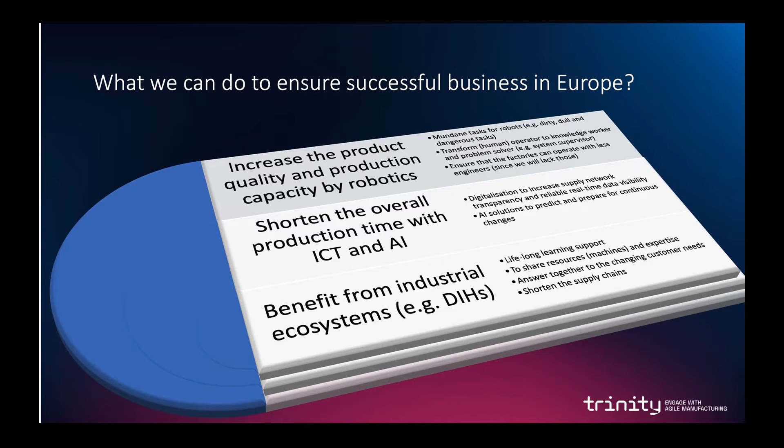In Trinity, our main objective is to create a network of digital innovation hubs. We want to have an established network of competencies around Europe. On that, we want to create a sustainable business model so that our network will be there for the next 5 years, for example. So we are looking towards the horizon of keeping up the network.

The third objective is to create a critical mass of use case demonstrations, assembled from different technical modules that can be reconfigured to fit the different purposes companies may have. In relation to today's topics, we will go through the services relating to the utilization of these different modules, which we hope are suitable for the upcoming open call number 2.

This was a very brief introduction to the Trinity project and the topics of today. In the Finnish part of this session, we will go through this in detail. Thank you.

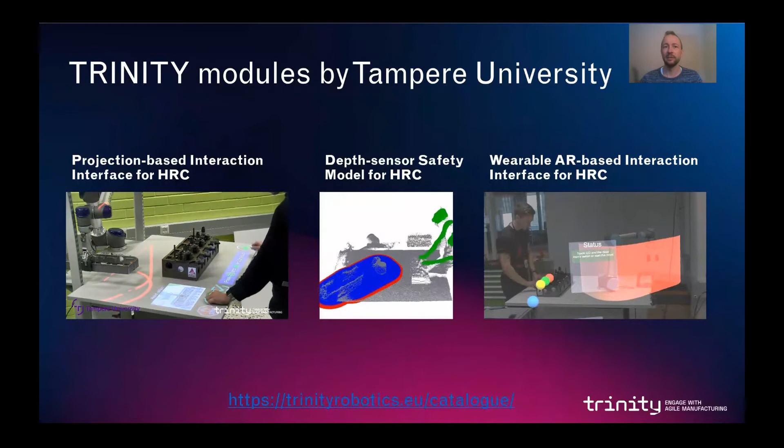Then we have the technical modules provided during the Trinity project. The 3 modules by Tampere University are the projection-based interaction interface for human-robot collaboration, depth sensor safety models for human-robot collaboration, and wearable augmented reality-based interaction interface. One possibility for how to implement these modules will be presented again in the last presentation of this session.

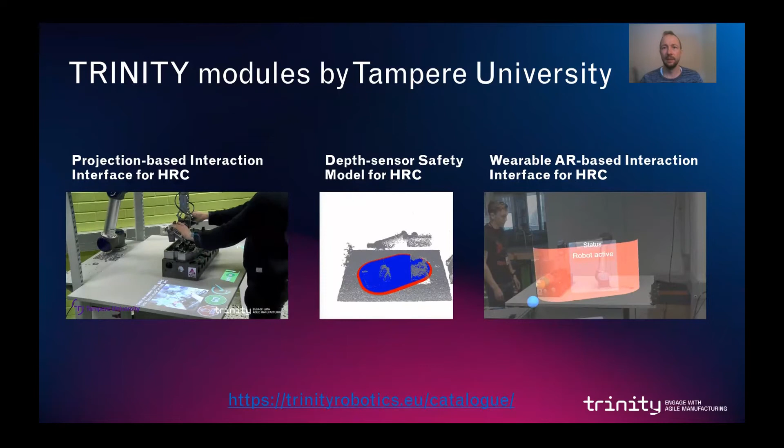Related to these modules by Tampere University, we can provide a bit more technical support and guidance on how to use and utilize these modules. All the code is open source, so you are free to use it and, for example, implement it in your own demonstration. They will later open a Trinity training platform where all the Trinity modules will be accompanied by different training material on the possibilities of these modules, how to implement them, how to use them.

So they all come with built-in training modules as well. But this work is still going on, so not all the material is available yet, but it will be coming bit by bit to our YouTube channel, and then it will also be listed in this training platform.

The help we can give you here is guidance and technical support, but if it requires more hours or more research work, then this needs to be negotiated case by case. This applies to all Trinity partners - they have resources to help you, but those need to be negotiated with the partners.

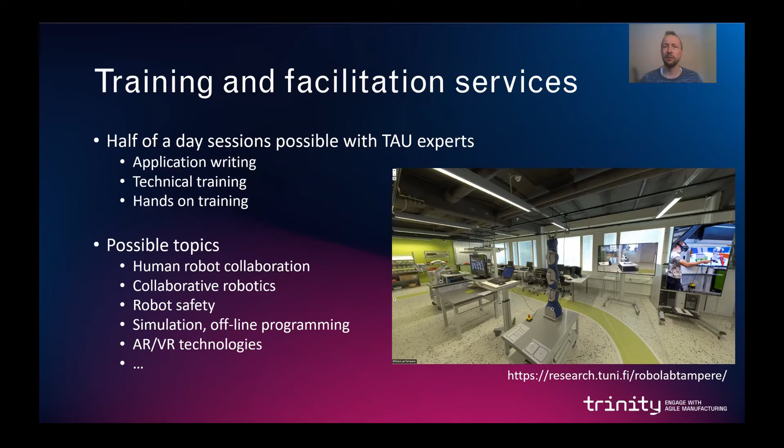These are just a couple of examples of what we have to offer, and feel free to contact us and request if you have any other needs. And that concludes the part of Tampere University services for Trinity.

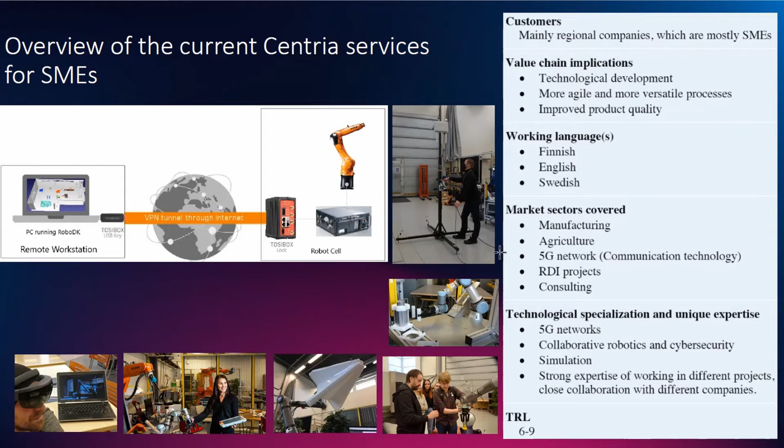And there is also cybersecurity, which is a very important part of robotics because usually the robots are quite vulnerable in industry, but there are possibilities for how you can solve these cybersecurity issues also. And then there is simulation, and CENTRIA has strong expertise with close collaboration with SMEs.

And here are the main topics which CENTRIA offers for Trinity-related services. And we have concentrated on Industry 4.0 technology, and we are offering analysis, demos, workshops, training, and different kinds of experiments with them. So we can do consultations and also consultations for funding and application writing, as Jyrki mentioned.

And for robot and cobot applications, we usually start with simulations, then we go to proof of concept or demos, and there is also a possibility to run experiments either in our laboratory or in SMEs' production facilities, and we can also offer training, for example, for robot programming or for robot simulation.

Same thing is with the safety systems. We usually start from simulations, then we can go to demos and experiments, and often we also create digital twins of robot cells or production lines if we are going to have a longer collaboration. Reverse engineering, which means 3D modeling, 3D scanning, and it can also lead to 3D printing, is often used.

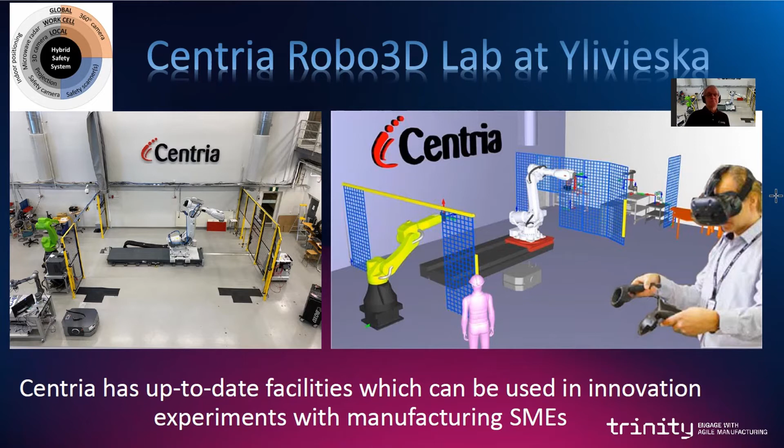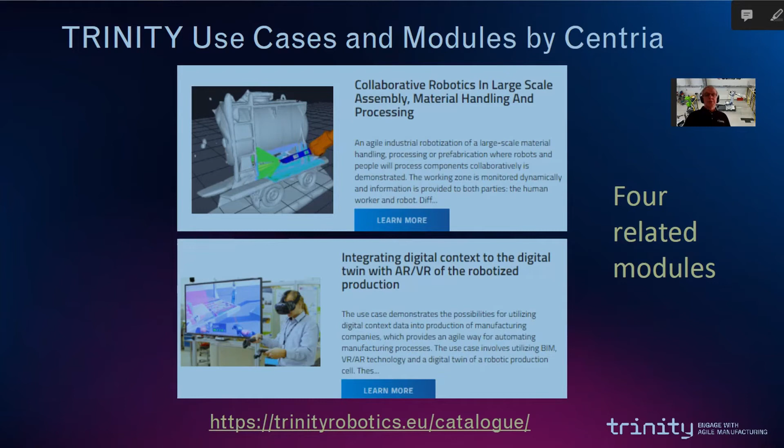So our use cases and modules are collaborative robotics in large-scale assembly, material handling and processing, and there are 3 modules related to that, and also the other, integrating digital context into the digital twin and AR VR of the robotized production, includes 2 modules. One is common with the other one. And Tero Kaarlela will also go deeper into these modules. And you can also find the modules and these use case demos in the Trinity Robotics catalog from our webpage.

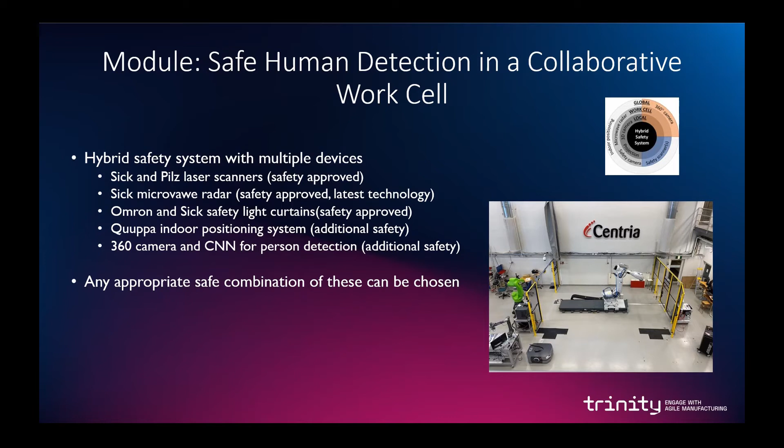And this module consists of multiple safety approved devices such as laser scanners, microwave radars, and safety light curtains. Additionally, this system also has safety devices for improved safety such as indoor positioning and 360 camera systems. And let's move on and see video of our hybrid safety system.

First, we will look at safety approved devices in this system. First is the light curtain in front of industrial robot cell. Second is laser scanner on the right side of the robot cell. And then we have laser scanner and microwave combination on the left side of this robot cell.

And the two laser scanners and microwave radar have been configured so that they will allow our mobile robot to pass these safety devices, but nothing else can pass. So humans will stop the industrial robot movement, but the mobile robot can pass all these fences created with safety devices. And in addition to these devices shown here, we also have

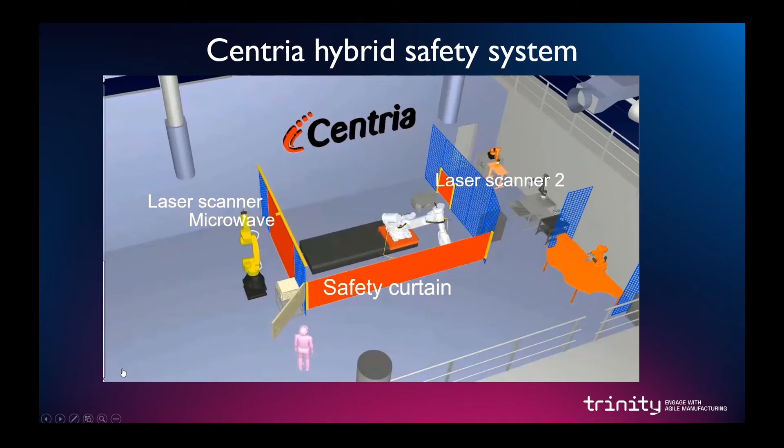Quuppa indoor positioning system that can be used for locating human workers inside our laboratory. This can also be used to locate forklifts and mobile robots, basically anything that is moving inside production facility, or in this case, in our laboratory.

Quuppa indoor positioning system is based on Bluetooth low energy, and we have the beacons in the ceiling, stationary installed, and all the moving parts like workers or forklifts have a Quuppa tag, a small Bluetooth tag with them, and it creates the location for them in order to create digital twin of this laboratory.

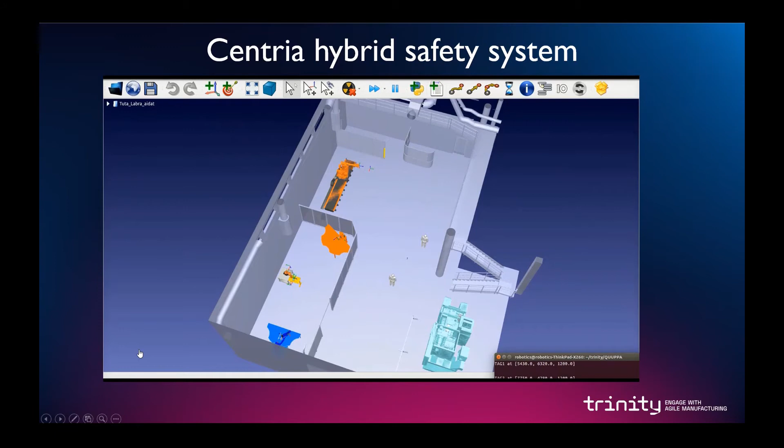Our next module is dynamic robot trajectory generation. Idea of this module is to utilize 3D camera for sensing robot work environment. Basically, this module adds vision capability for robot controller. Camera can be any of popular models such as Intel RealSense or Microsoft Kinect.

Module provides capability to scan robot environment and to create new trajectories for robot in case obstacles are detected in current path. Let's say that someone puts an object on the robot's path. The module will calculate a new trajectory that will go over this obstacle on the fly. This module is currently based on ROS, but it can also be implemented with RoboDK or AutoMAPPPS.

Our third module is online trajectory generation for industrial robot with 3D camera. Also, this module supports many different cameras, such as Intel RealSense, Orbbec, or Microsoft Kinect, or maybe even Artec Leo. Idea of this module is also to utilize 3D camera for sensing robot environment, but for different need.

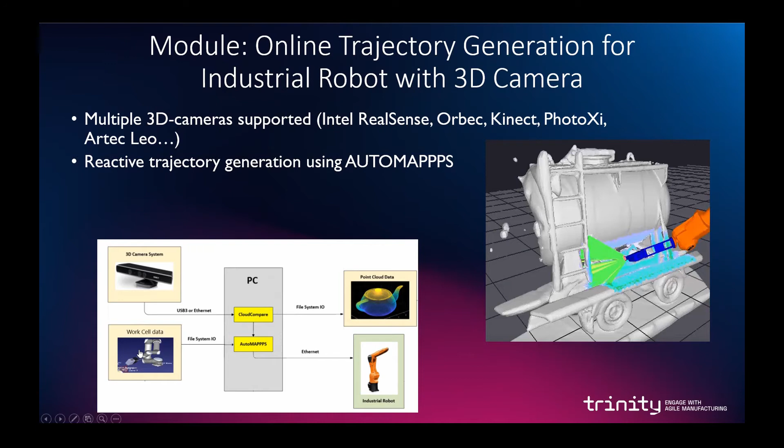Our last module is about integrating data needed for robotized production into product design data at very early design phases. This way, it is easy to utilize in production phase and avoid work in the production phase of the product.

Digital design content data can also be used when creating a digital twin of the work cell, which can be used in AR/VR experiences for monitoring, operational support, training, safety, and maintenance purposes. Picture on the left shows digital twin of robot controlled with VR equipment. Picture in the middle shows a VR experience for training purposes. Picture on the right presents a VR experience for safety training in mining environment.

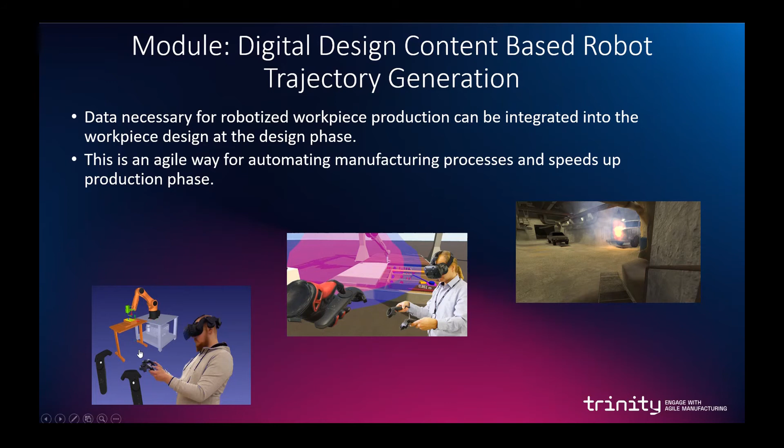Here, our first use case demonstration is presented. This use case demonstration is collaborative robotics in large-scale assembly, material handling, and processing. This use case is based on 3 modules shown before. First one is the safe human detection in a collaborative work cell. Second is dynamic robot trajectory generation based on information from 3D camera. And third one is online trajectory generation for industrial robot with 3D camera.

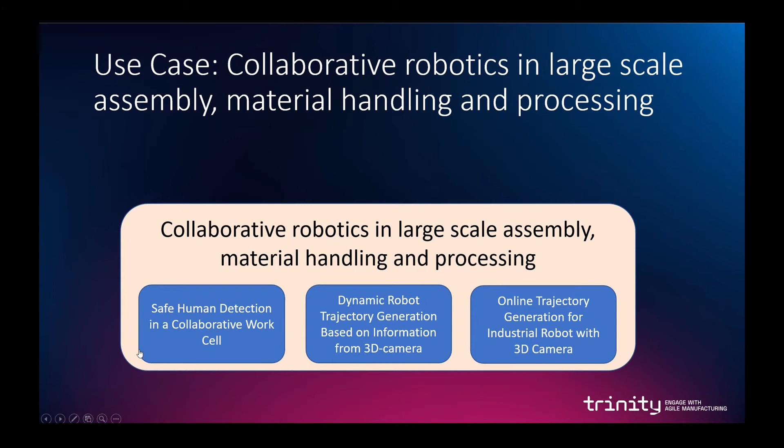This use case demonstration is about enabling high payload industrial robots to collaborate with human workers, and also finding more agile ways of programming robots. Here we present our first use case demonstration video. Idea is to provide drive-in heavy equipment washing service. It is intended for excavators, wheel loaders, and heavy trucks. And let's see how it's done in practice.

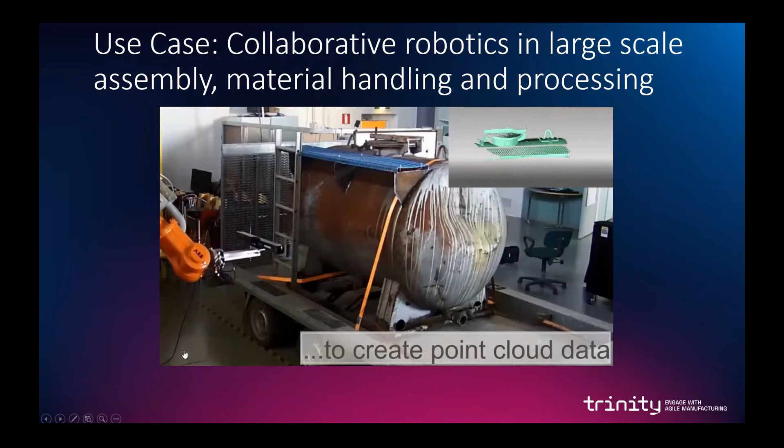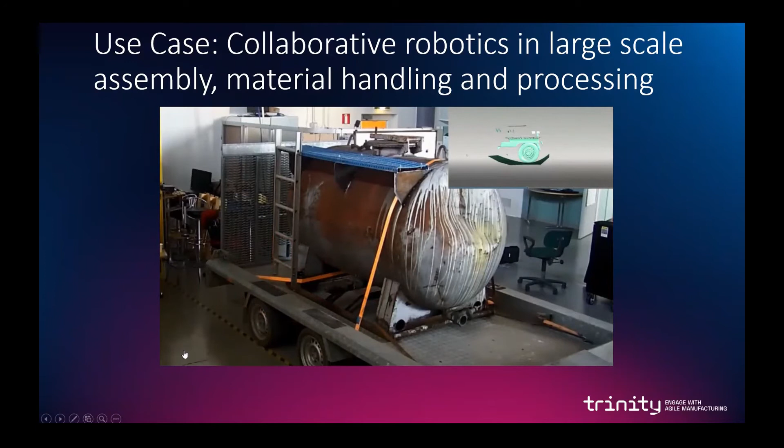First, the work object is scanned with 3D camera in order to form a point cloud of this object shown here. After scanning the object and creating a complete point cloud of this object, washing trajectories can be created for the robot. This use case can also be utilized in painting, sandblasting, and also in recycled material sorting, such as battery sorting purposes.

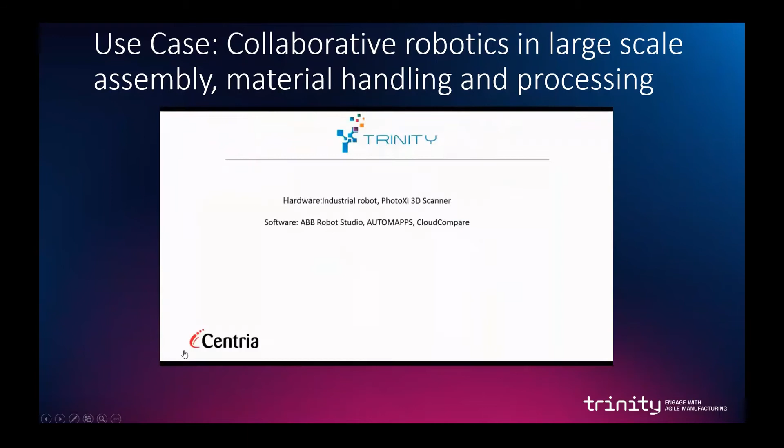Our second use case demonstration is integrating digital context to digital twin with AR/VR of the robotized production, and this use case demonstration is based on two modules shown before. First one is safe human detection in collaborative work cell, and second is digital design content based on robot trajectory generation.

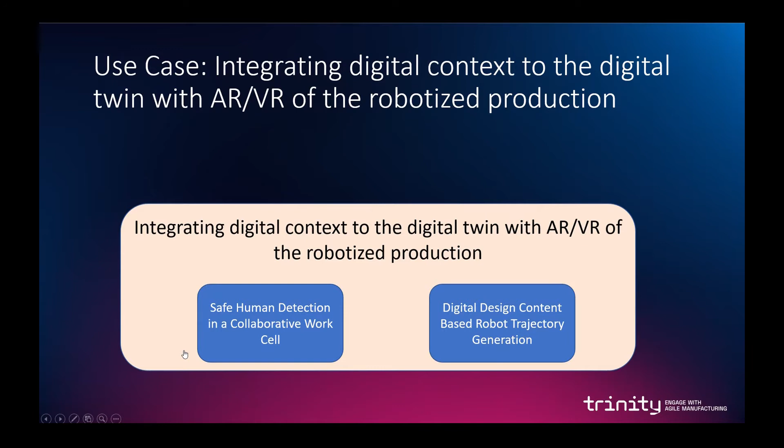This use case demonstration introduces a new way of working, where data needed for robotized production is included in product data at very early design phases. And the first video on the left shows us a use case demonstration for manufacturing building floor elements. Okay, in this video you can see how the information included in the building information model can be utilized in robotized production afterwards. This is a building floor element.

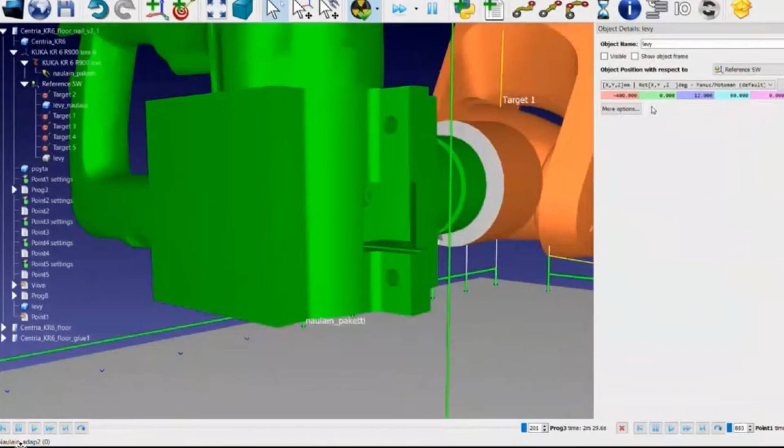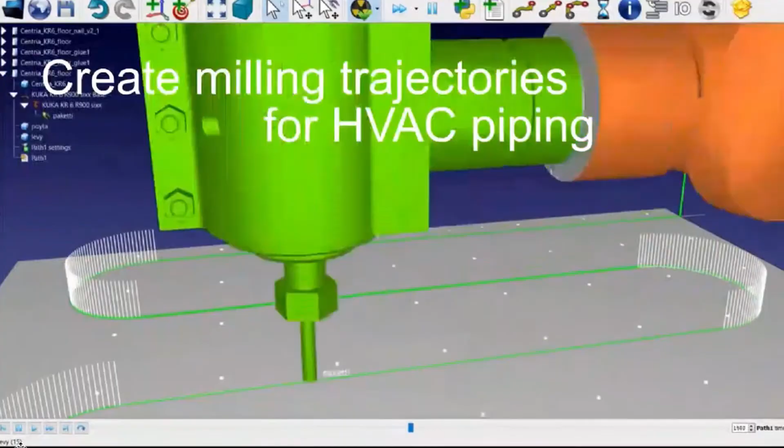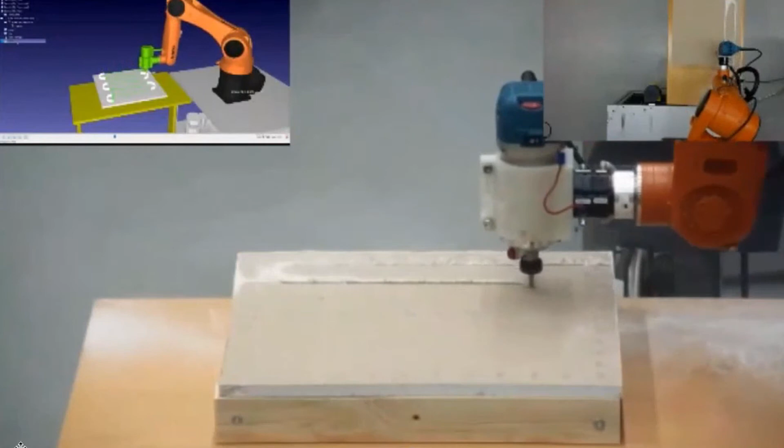These points for nailing have been included in the building information model, so it's easy to utilize them when the production phase starts. Also, we can create milling trajectories for heating piping on the floor elements. And for the last layer of floor element, we can utilize this information for creating adhesive laying routes for laying adhesive between the floor element layers.

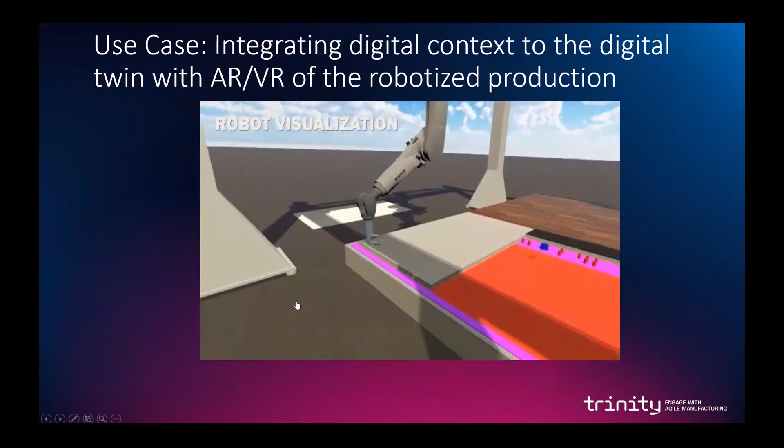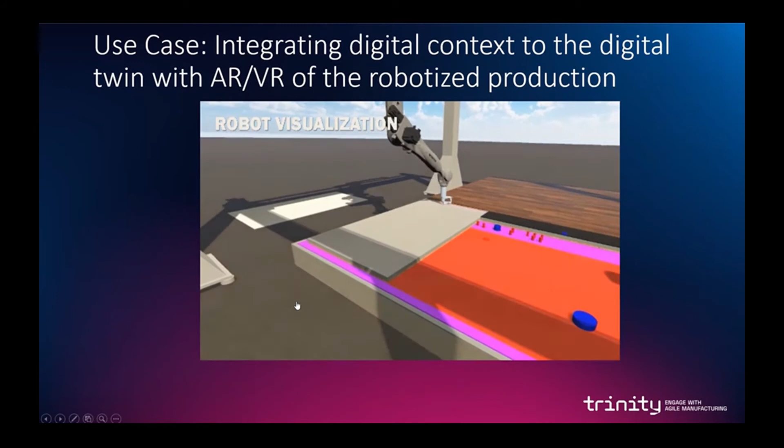And this second video will show how to create AR/VR experiences from robot cell models. This one is used for training purposes of new employees when the actual floor production starts at the factory. Here we can visualize safety areas. The blue area will slow down the robot movement, and the red area will stop robot movements. And this way, new employees can safely get to know the robot cell before actually moving into the robot cell and start working there.

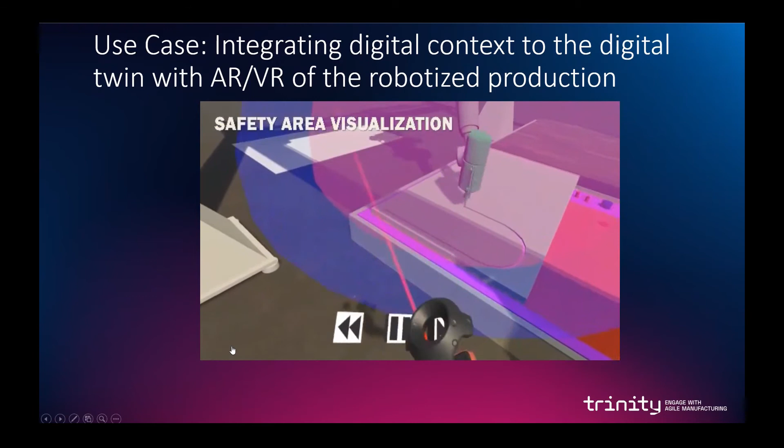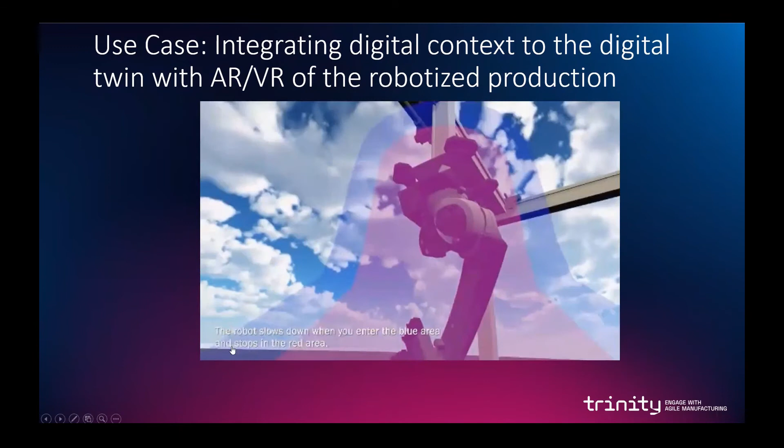I think, Tero, we need to start wrapping up so we stay in schedule.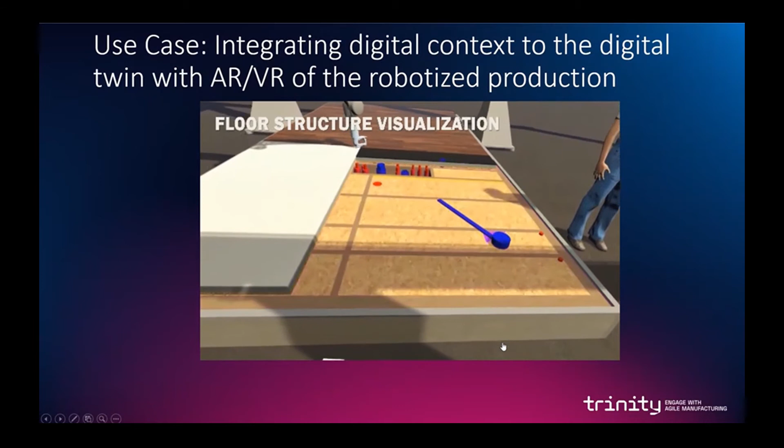Okay, this can also be utilized for aftermarket purposes, where you can see the inner structure of the floor and can take measurements of the floor after the element has been manufactured and it is in use.

This allows us to share equipment with Narvik, Norway University, and also we have been collaborating for educational purposes, educating their students with our equipment and vice versa.

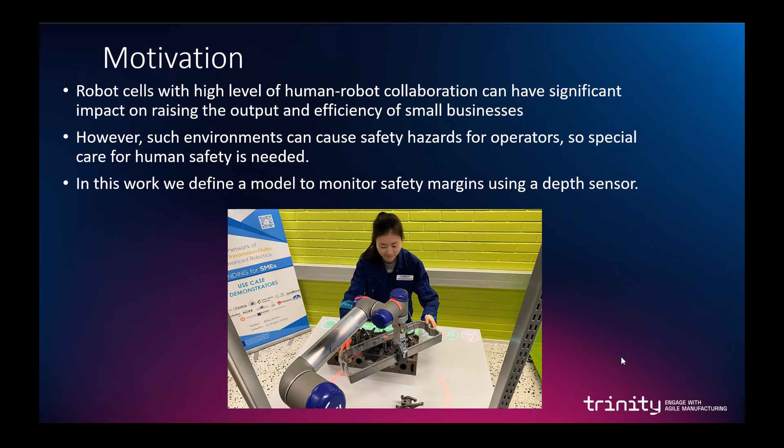So let's talk a little bit about how the safety model is organized. The workspace that operator and robot use together is divided into two zones. First is the human zone, the human area where the operator can perform his list of tasks, and there is a robot area. These zones are not static. They can change during the assembly process.

So the zones are tracked with the depth sensor. The model tracks the current depth values of the environment and compares them with some initial depth values, which could be stored in the system beforehand or initialized at the startup of the system. If the difference in depth values on the border between zones becomes too large, the robot halts its operation until the user moves away from the robot zone and reruns the robot program manually.

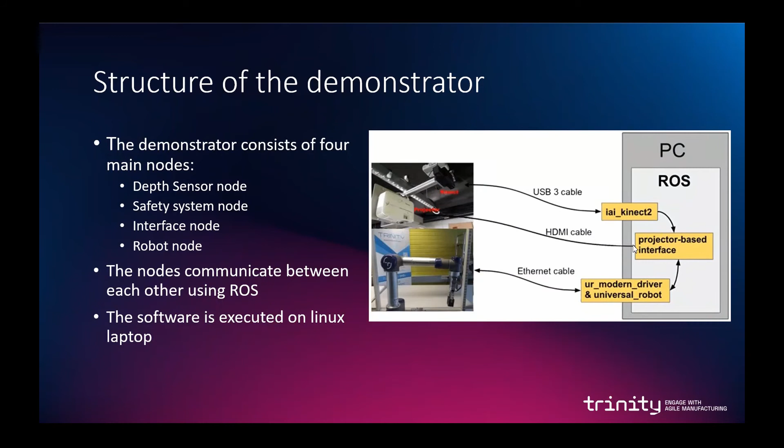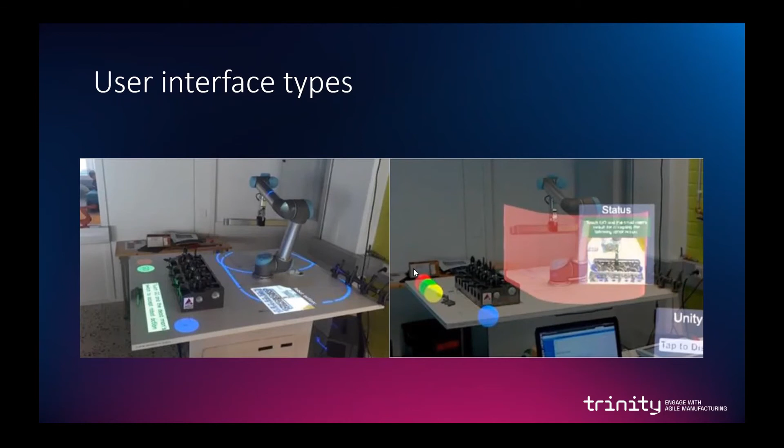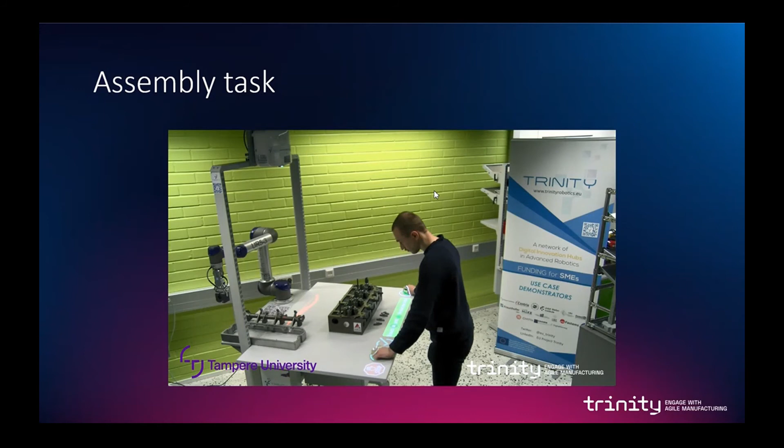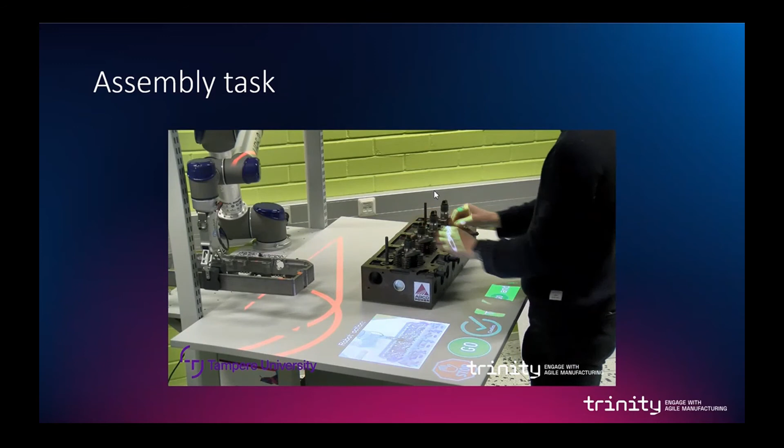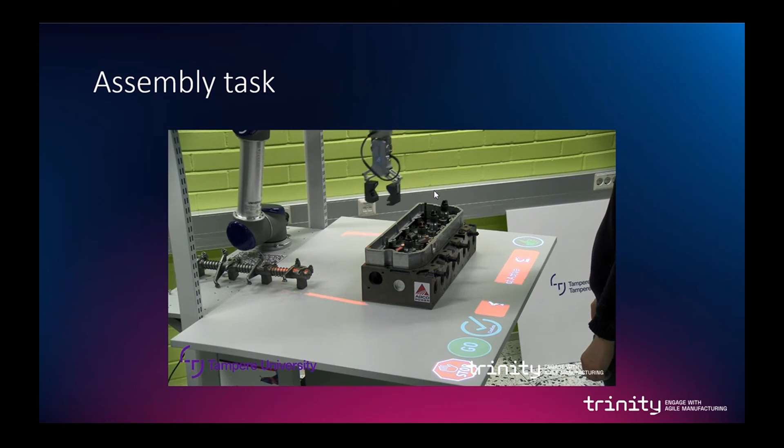So the demonstrator was tested on the task of engine assembly. I will now play a short video to demonstrate how this test was processed. So first, the operator needs to install rocker arms while the robot picks up the rocker shaft. Then the robot puts the rocker shaft onto the engine. And then the user installs the rocker shaft with the help of the robot.

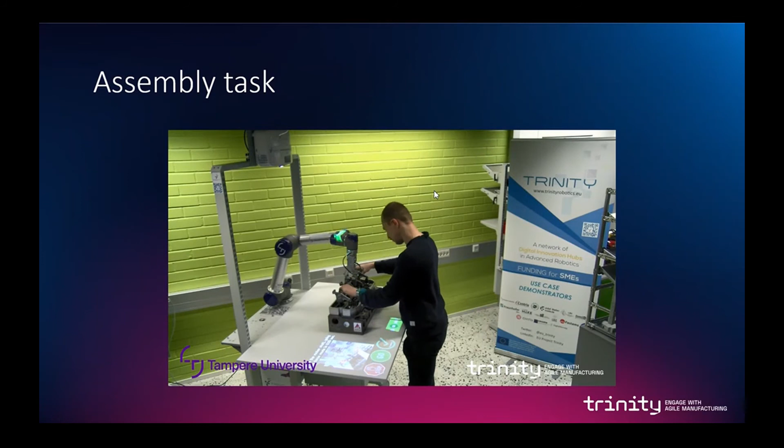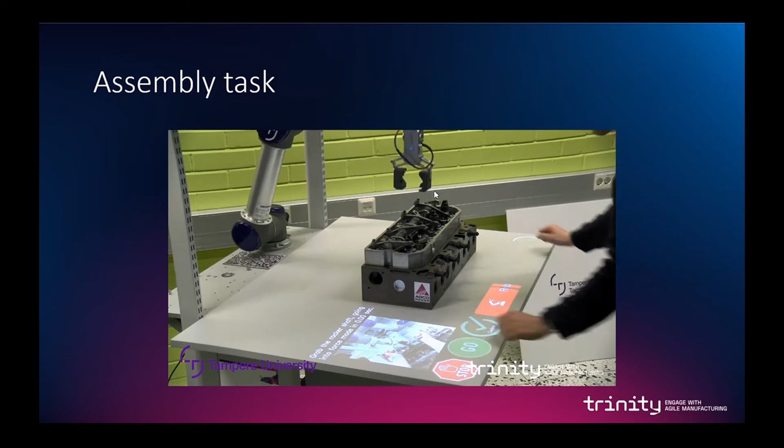Okay, so we tested the task for both AR and projector-based interfaces. And the experiment was also compared with a baseline approach, where robot and human cannot operate at the same time, and the user has to stay at least 4 meters apart from the operating robot. So, okay.

So the results have shown that both AR and projector implementations perform better than the baseline in terms of total execution time and robot idle time. So the total execution time was improved by 21%, and robot idle time was improved by 57%. On the other hand, the difference in execution time between the AR interface and projector-based interface was insignificant. So both approaches are viable in terms of execution time.

We also used a questionnaire and some subjective testing to determine which approach users prefer. And surprisingly, the AR interface was deemed most unsafe by the users. The reasons given by the users and which we saw from the questionnaire were that the HoloLens does not give the full field of view to the user, and the device itself is quite heavy to wear. So operators are not very comfortable operating with HoloLens. Therefore, projector-based approaches seem to work better for now, until better AR solutions come out.

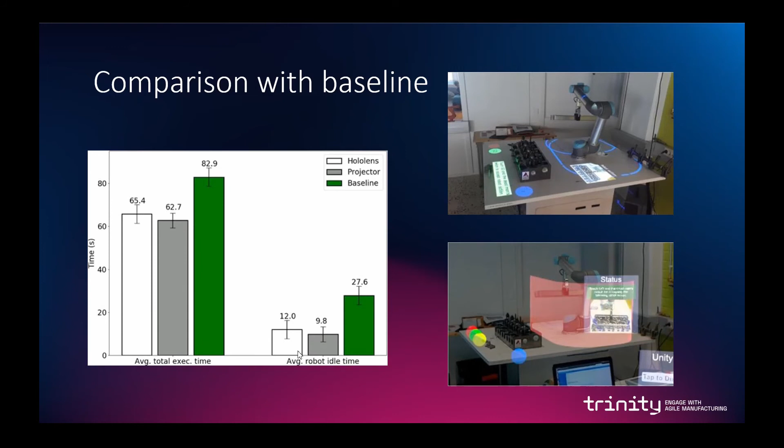Let's move forward. So we have interesting presentations from the Trinity demonstration Agile, which is led by Allbesmart in Portugal. And we have Hugo Marques here to present the technical side of this demonstration. And it gives also a good example of how the Trinity modules described here by CENTRIA and Tampere University, and other modules by other Trinity partners, can also be utilized by SMEs. Go ahead, Hugo.

So thank you for the opportunity. Nonetheless, it's quite early for Portugal to start at 7:30 in the morning. But of course, business doesn't have a specific time schedule.

Okay, so the presentation I'm making is on behalf of the team of the Agile project, which is one of the experiments being supported by Trinity. The Agile consortium is composed of two SMEs.

Allbesmart is an SME from 2015, so it's roughly 6 years old. It's on the end of the startup life cycle. It's very stable at the moment, with a very good number of customers, and Stone Shield as well, a little bit younger than Allbesmart, but also already a very interesting industrial manufacturer of robotic machines. Both of these companies are Portuguese, and this is the background that brings us here.

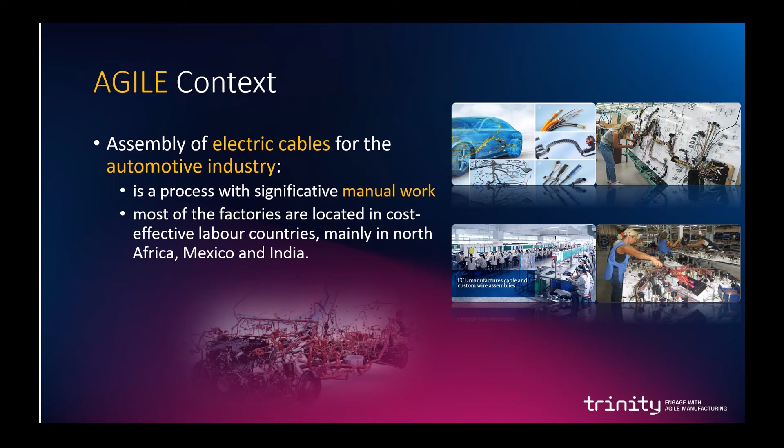We are focused basically in Portugal. We have a very strong affinity with the electric cable automotive industry, and specifically in the city where we are, we have a few key companies, worldwide leaders in their sector, and we are focusing basically on the manufacturing of electrical cables, which currently require much manual work.

But nonetheless, just for you to understand the context, before COVID we had around 90+ million vehicles manufactured every year. And if you count all the electrical cables that are manufactured around the world, 60% of these cables are going directly into these automakers, into these vehicles. But the question is that most of the electric cable assembly is done manually, and we use low-cost labor countries for that.

But due to the requirements of miniaturization, these electrical cable manufacturers are more and more requiring robotics and the assistance of machines. And this means that the workers need to be trained, and the way they interact with the machines also needs to be rethought. And this is where Trinity provides us with the inspiration.

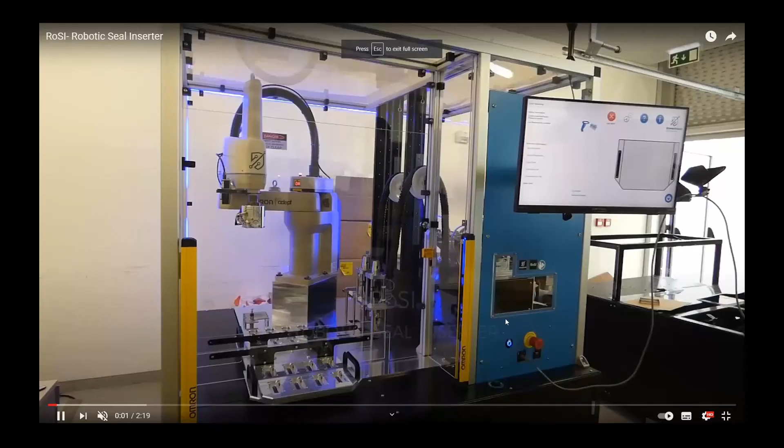Then you can see that Allbesmart is the technology provider, and it provides this technology to companies. Specifically in this case that I'm presenting here, our customer or our partner on this project is Stone Shield. And Stone Shield is the integrator of the robotic machines. I will go back one slide just to show you a small video of the machine that we are talking about.

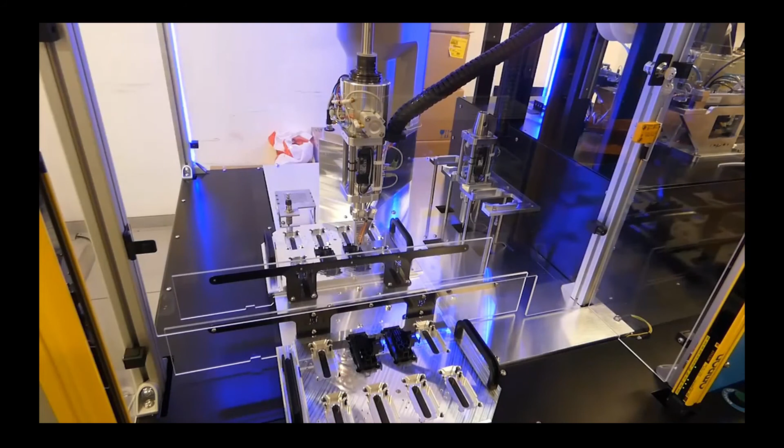This is a robotic seal inserter. As you can see, it is not a collaborative robot in this case, so the robot is enclosed to protect the technician. And what you have is small components which are cable connectors. In this picture, you can see that the connector will have some seals. The seals are some plastic protection units that you put in order for the connector to be sealed, either against air or humidity, etc.

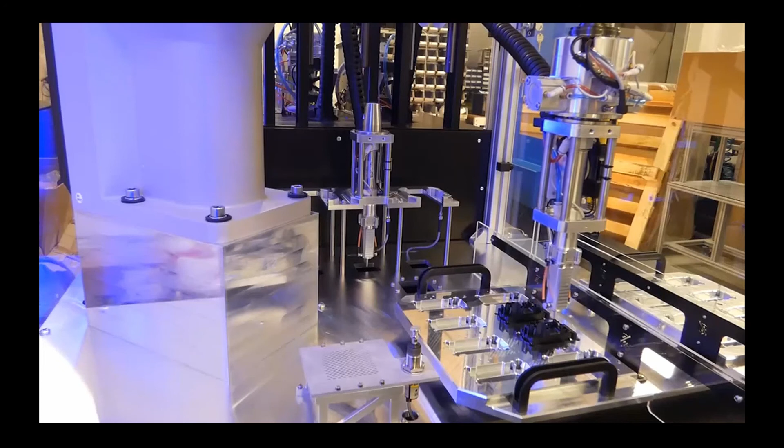And in this case, the robot has different types of grippers. It depends on the connector, and based on this, it will perform its action. Okay, so this machine, of course, is semi-automated, and we are working on top of this machine to provide augmented reality and also to provide classification for these connectors that you are seeing here. So I will go back to my presentation.

And StoneShield then has a list of customers. They provide these machines per request, so they are customized machines for specific cable manufacturers. In case you are not familiar with the industry, Yazaki, Leoni, and Aptiv are the most well-known cable manufacturers for vehicles. And then, of course, they have their own clients, and this could be BMW, Audi, Ford, Ferrari, etc.

So Agile focuses on three use cases, as I was saying. It was inspired by three use cases from Trinity. The first use case is the collaborative assembly with a vision-based safety system. In our case, we are using this to make a collaborative assembly of electrical fuse boxes. I will explain it to you immediately after.

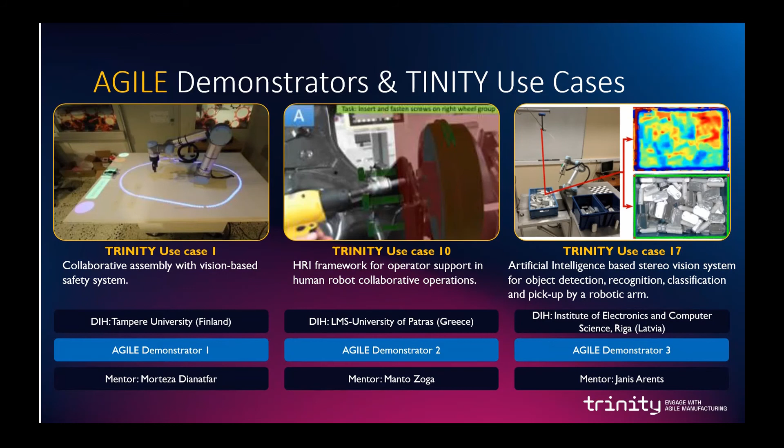Then the second use case, which I will not focus on in my presentation today because we will not have the time for that, is based on augmented reality. So we are providing an augmented reality interface. And the third use case is based on a bin picking process in which we have to sort connectors that have been used into different boxes. So the connectors that come from this machine, at the output, we sort them and put them in different boxes through classification.

So let's start with the first use case. Our goal here is to use a slower robot. It's a collaborative robot that allows the technician to mount specific fuses on the fuse box that you can see below, and then the robot will assemble the other fuses. So this can be done while the technician is not at the station or while the technician is at the station. That's why it is a collaborative use case that we are exploring.

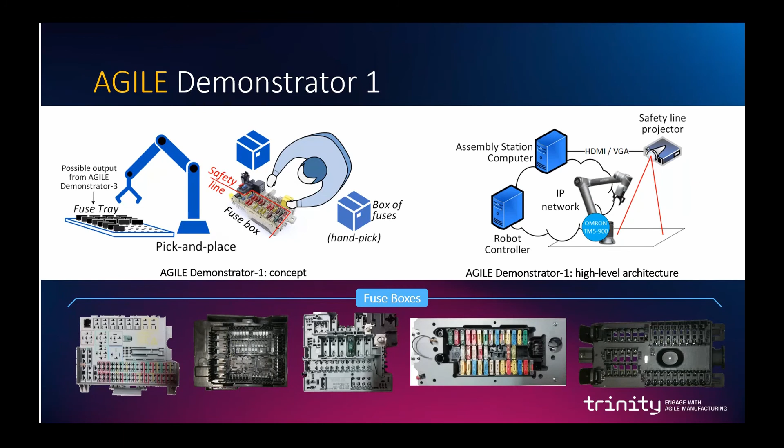We have a specific assembly station. Here on the figure, you can see that we are planning a station with 3 fuse boxes. For the time being, we are just working with 1.

You have all this red line here, and this is our projected safety line, as was explained by the previous presenter. Because this is a collaborative robot, we provide the technician with visual guidance where it is safe for him to operate. Nonetheless, the robot also has its safety zone, and since it's collaborative, the velocities in place here are slower than normal.

But anyway, we have a goal, and our goal is to reach a 30% decrease in the cycle time for a fuse box assembly. By putting the assembly in a collaborative process with the robot, we estimate that we can reduce the average time by 30%.

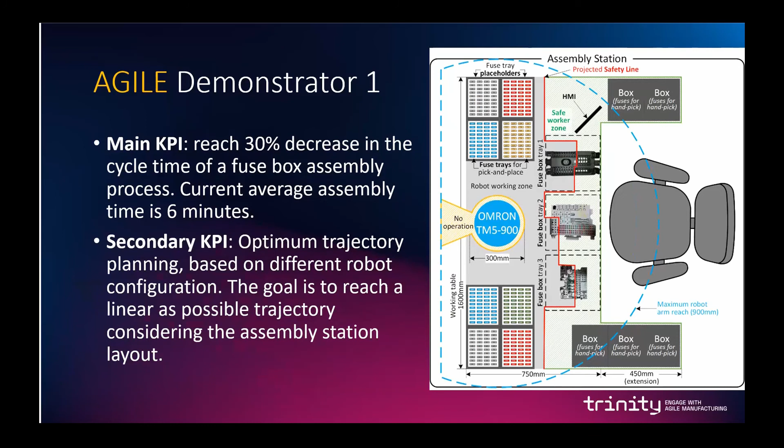I will just show you this small video. Again, this is not the final product. This is just something that we are still working on.

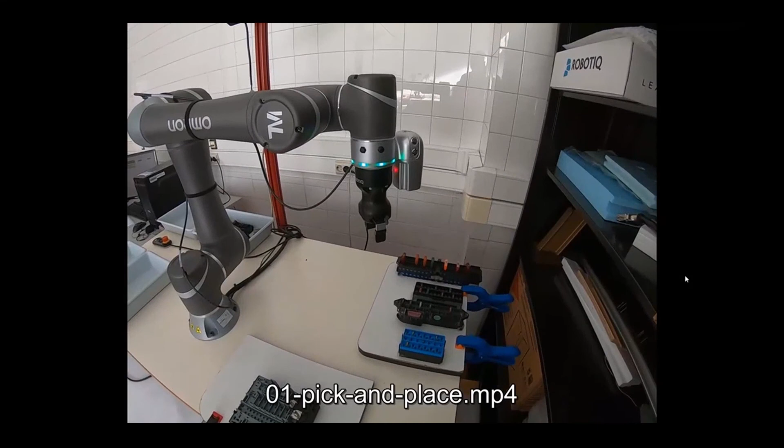So the initial position of the fuse box is pre-coded, and then we have a delta for the next fuses, and then we will insert the fuses into the fuse box.

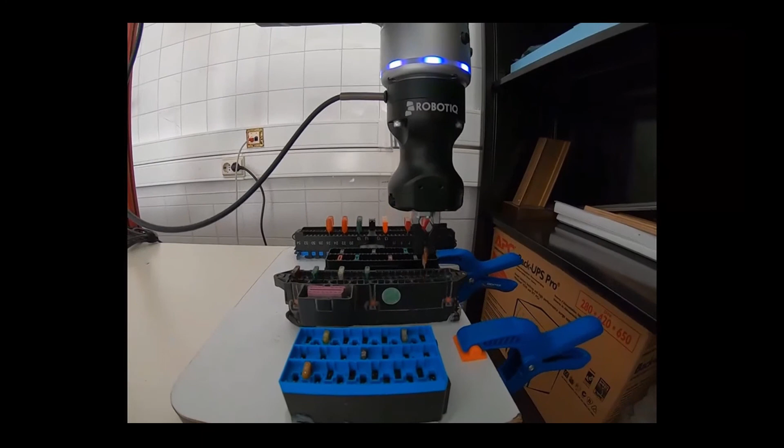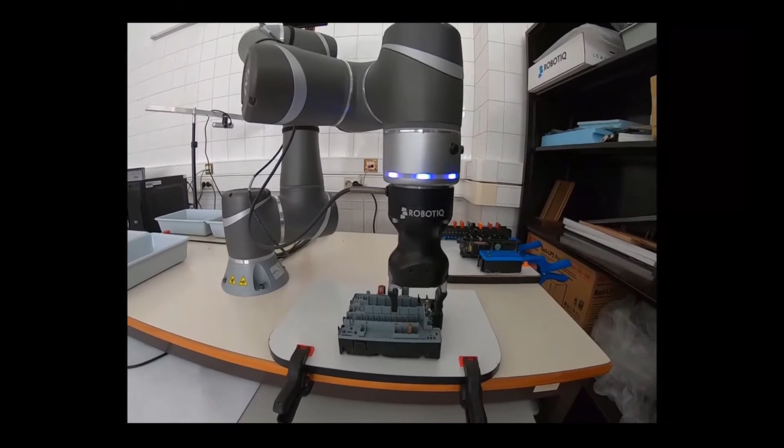Of course, the feeder for this demo that you are seeing is not the final feeder that we want to use. Here we are showing different types and different sizes of fuses, and you can see that the robot arm's gripper is a little bit bigger than what we originally were requesting.

So this is something we have been doing now: we have machined, designed, and requested the manufacturing of a new gripper, which will be shorter, and this will allow us to pick up smaller fuses, which currently we cannot do.

Also, the feeder system for the fuses here is just for our training, but in the next iteration, we will have a different type of feeder for the fuse.

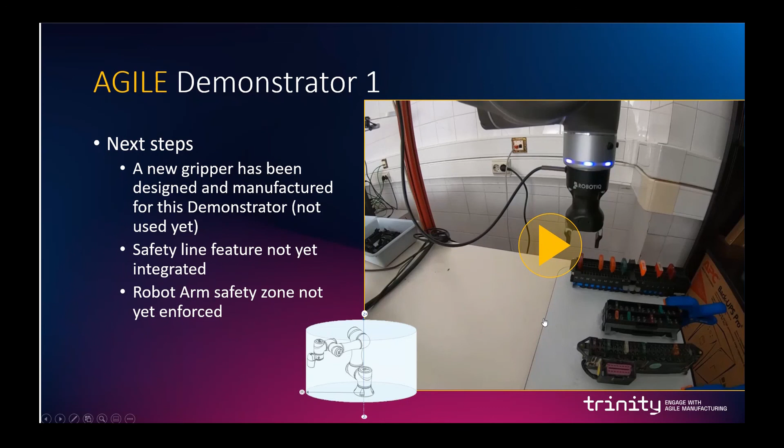For quality, we use many connectors to train the machine and to make sure it reaches a very high percentage of efficiency. So when the connectors are assembled, whether okay or not okay, at the end we need to reassemble the connectors. We receive the connectors in boxes, and then we have to sort them.

This was originally a manual process, and what we want to implement with this project is to actually identify the connectors automatically, and based on their classification, to put them into different boxes.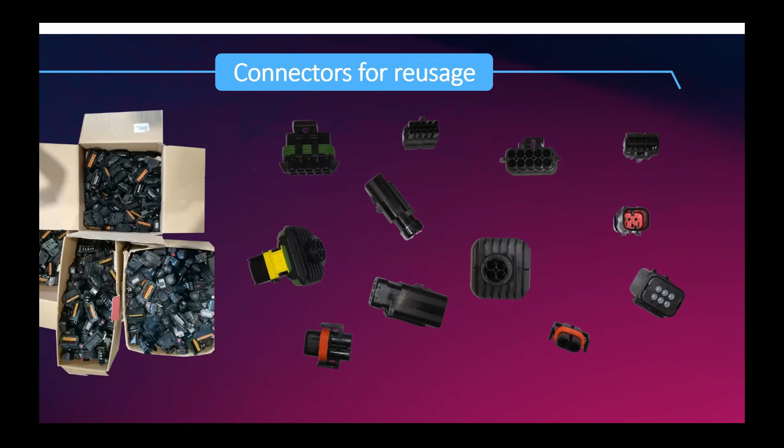Then we have a 3D camera vision system, based on Intel RealSense, which has a different system of coordinates. And then we have the connector that we want to identify, which also has a different system of coordinates.

The challenge for us is to actually make all these three systems of coordinates work together, in order for us to not only identify and recognize the object, but also to pick it and then place it in a different box.

Here I will show you the first part of the assembly process, the recognition process, which was also inspired by Trinity, because we are using YOLO.

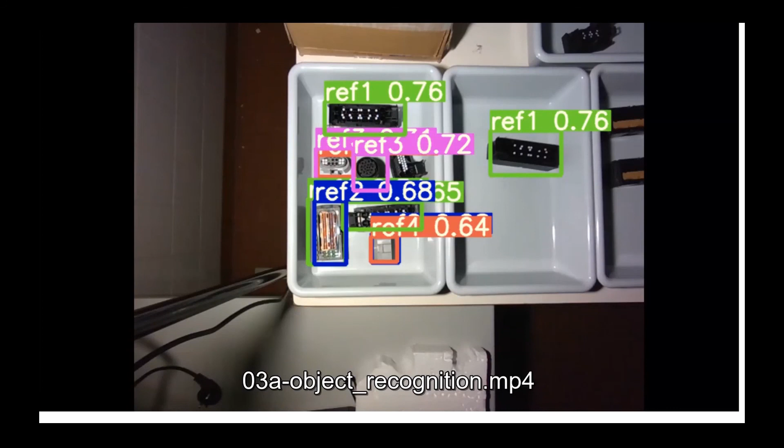So let me show you that here. What you're seeing is the 3D vision camera, and this is the automatic object classification based on the results from the training. So you put different objects.

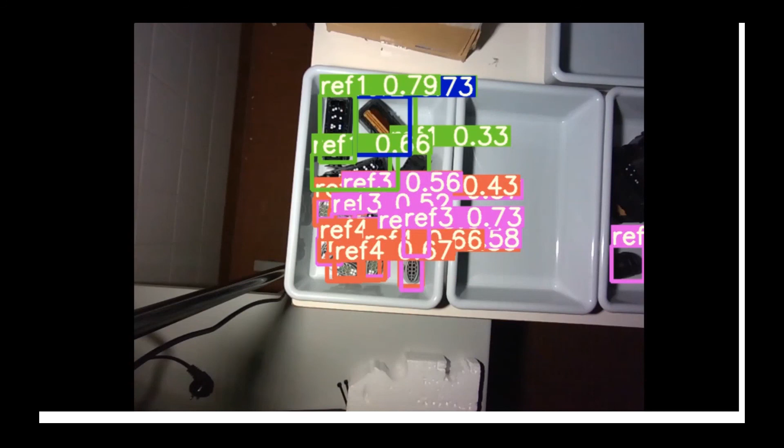First you facilitate, you put the objects all in the same place, and then you sort the objects and train the machine learning algorithms in order for it to recognize that the same connector can be in different places and in different positions. And we have achieved for the time being a very interesting rate of success in terms of object classification.

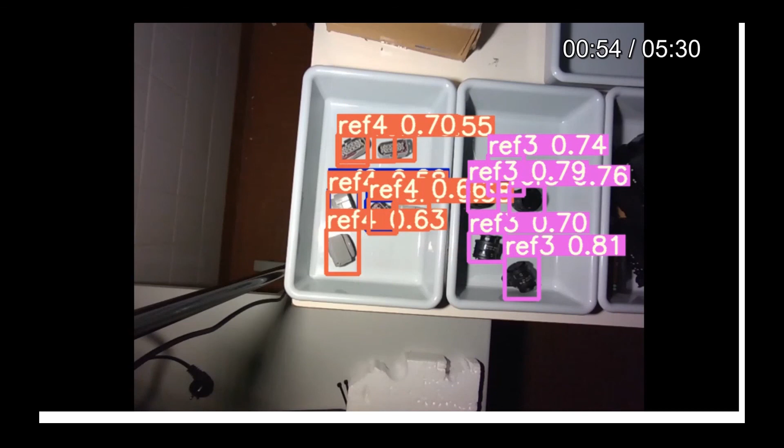So I will just speed up the video and show you that at the end you have different backgrounds on the objects and still it is able to detect them. This took us some time, because, as I was saying, it is a challenge to make the system of coordinates synchronized between all the variables that we have in our system.

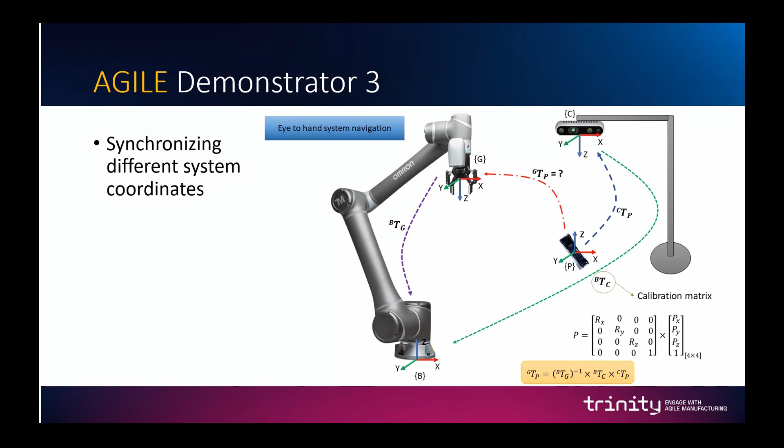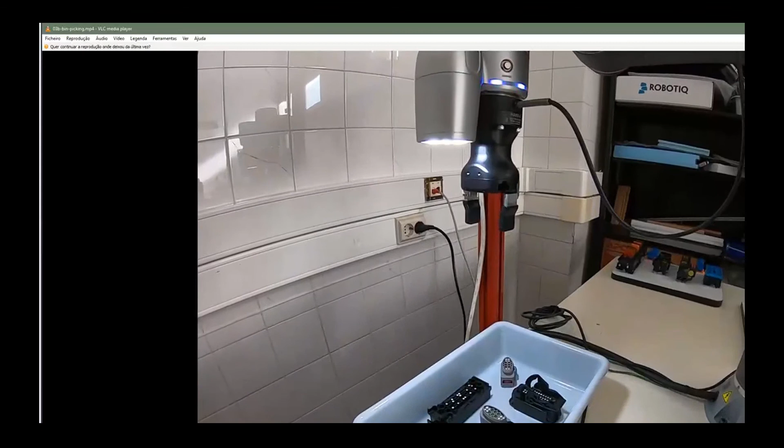And here I will just show you a small video, not so small, but 1.5 minutes. So here you have different connectors. The robot detects the connector and then places it in a specific orientation.

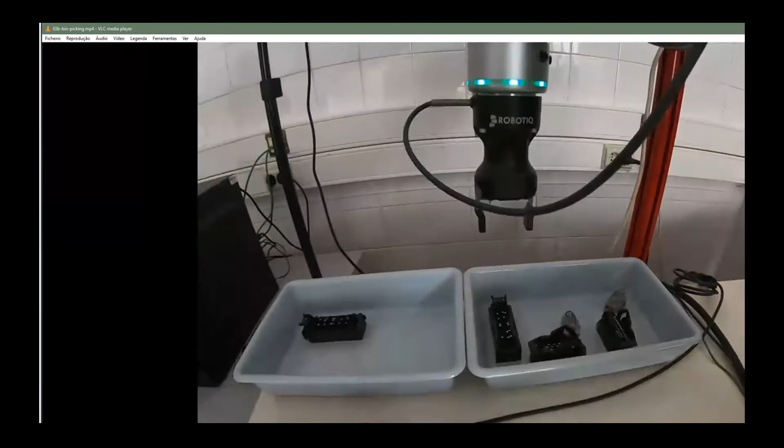The orientation is something we are currently working on. We need to make sure that the objects are oriented. It could not be oriented in this case, but we are challenging ourselves in order to ensure not only the correct sorting, but also the correct orientation of the object.

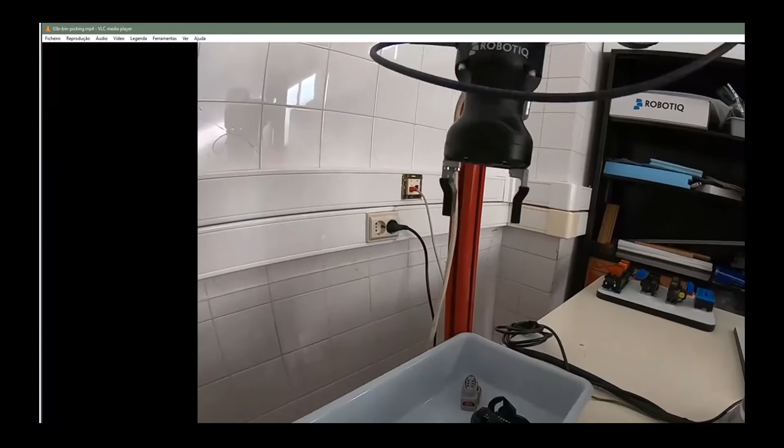I'm speeding up the video here because, as I said, this is a collaborative robot, and as such, it is slower.

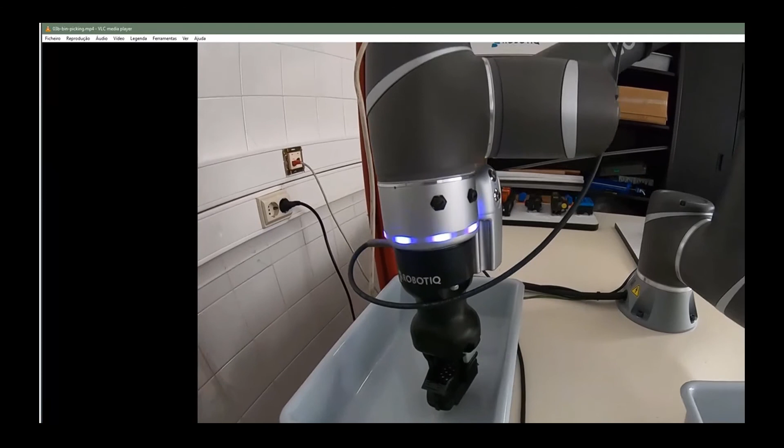For the last piece, we would like to show you that the orientation is actually quite a challenge for us, because here you will see the robot decide the best way to pick this object. It makes different visualizations of the scene, and then it decides that the centroid for this object is in that position, and that's exactly where it should pick the object.

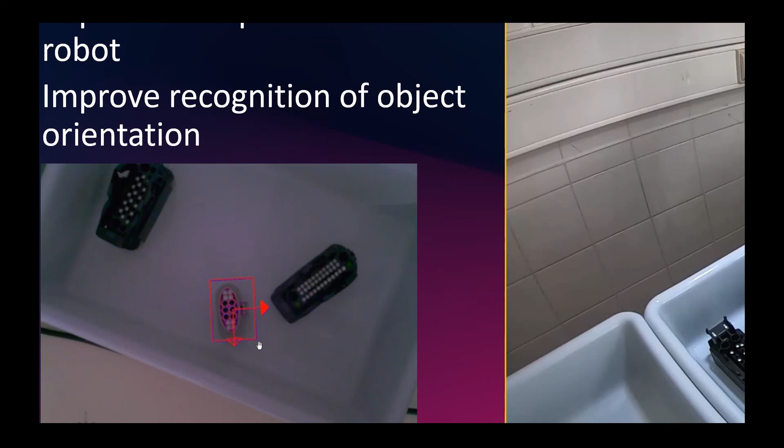You can also see the objects are oriented at the end, because we have these two lines, a red line and a purple-bluish line. When they match, this means we have achieved the right orientation. This is something that is not yet 100%, but we are still working on it.

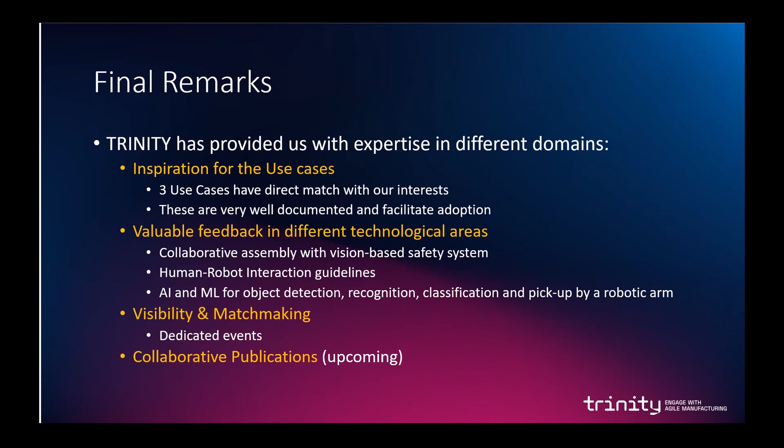Thank you very much, Hugo. I think this is a great example of how the TRINITY modules can really be implemented and utilized. And I find the machine learning part very interesting, because that's a very hot topic at the moment. As you mentioned, finding the components isn't that big an issue anymore, but deciding how to grip them and what's the best option for the robot requires quite a lot of work, which quite often tends to be forgotten when you talk about machine learning in these kinds of computer vision applications. But thank you very much.